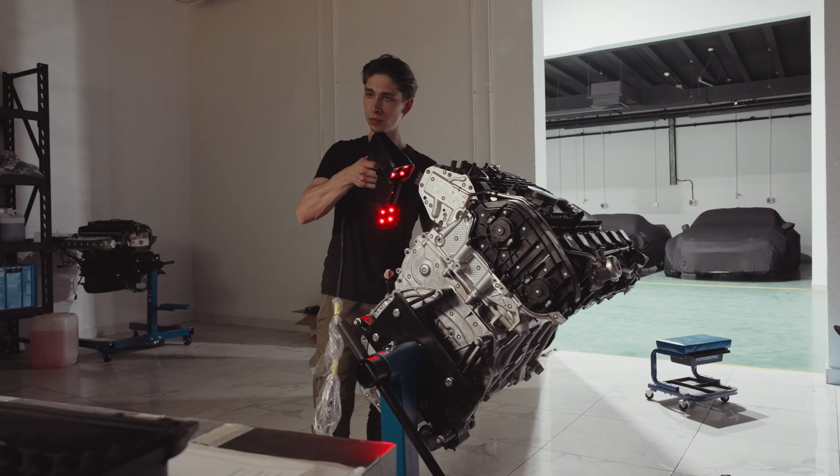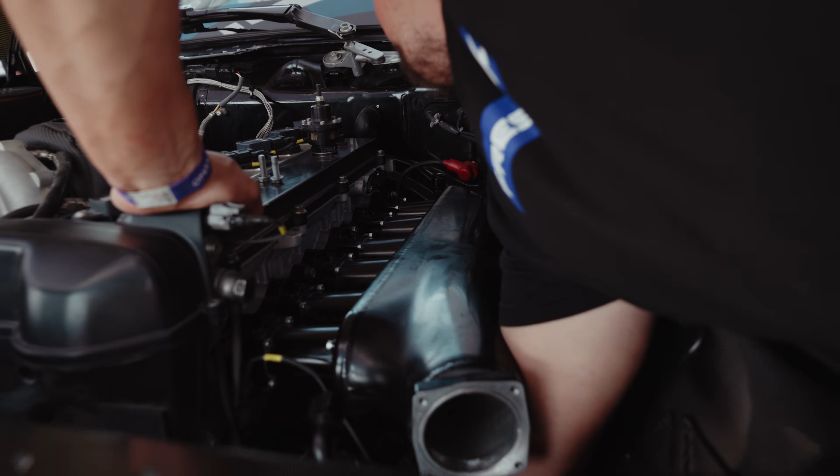Nowadays, there is the undisputable king of drifting, and of course, it is the 2JZ engine. It is proven by decades, and of course, it's reliable, it's tunable, and it's a ready-to-use solution. But we're using the BMW S58 for our Nissan Z platform. Why? Because we like challenges.

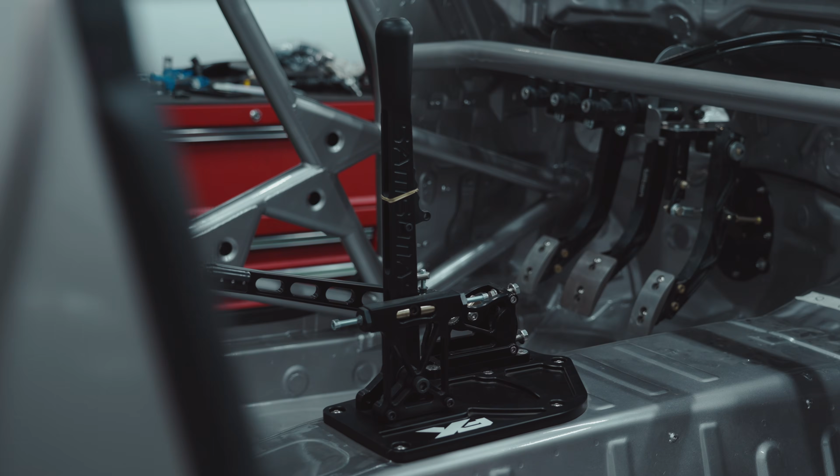But to be more serious, we want to stay ahead of the time and prove the S58 is not just a new engine, but it's a good platform for solutions and for engineering stuff. So let's have a quick look at it. The 2JZ is quite an old platform and it has a cast iron block. At the same time, the S58 has an aluminum one.

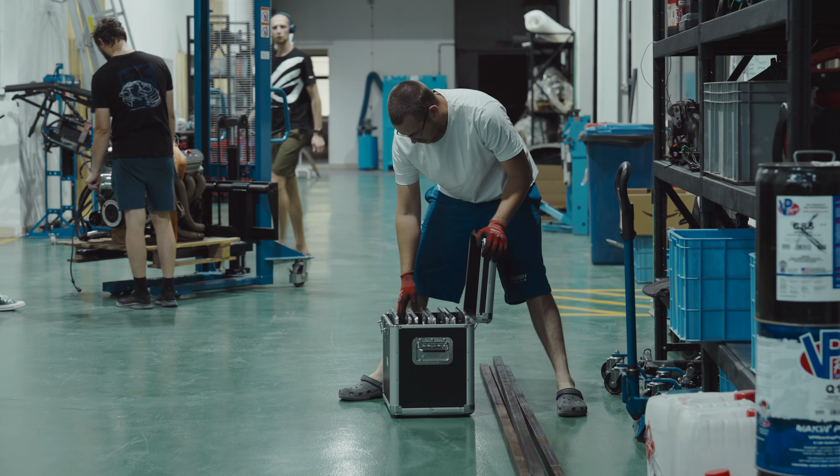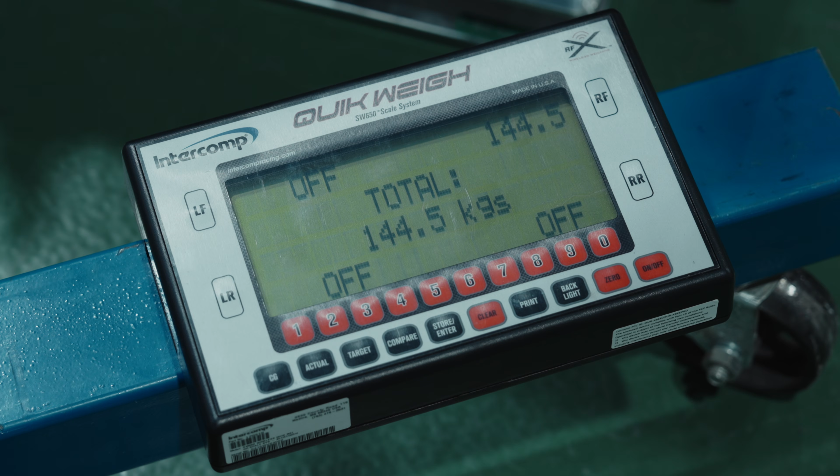We weighed these two engines and it turns out that without fuel pump, accessories and injectors, the S58 is 113 kilograms, and at the same time the 2JZ is much heavier, it's 144. And the third one, despite 3 liters for both engines, the 2JZ is distributed injection, and for the S58 it's direct. That's way better.

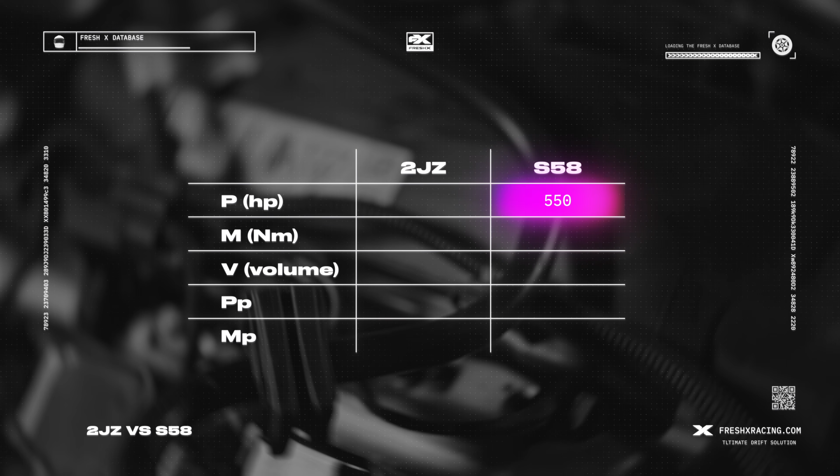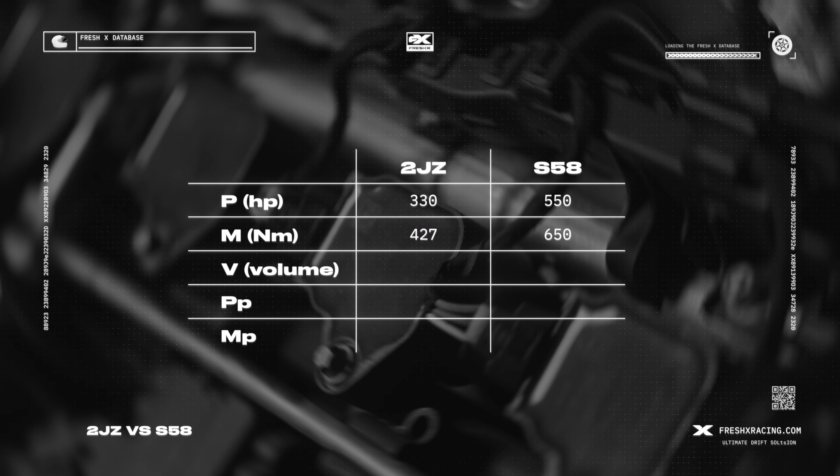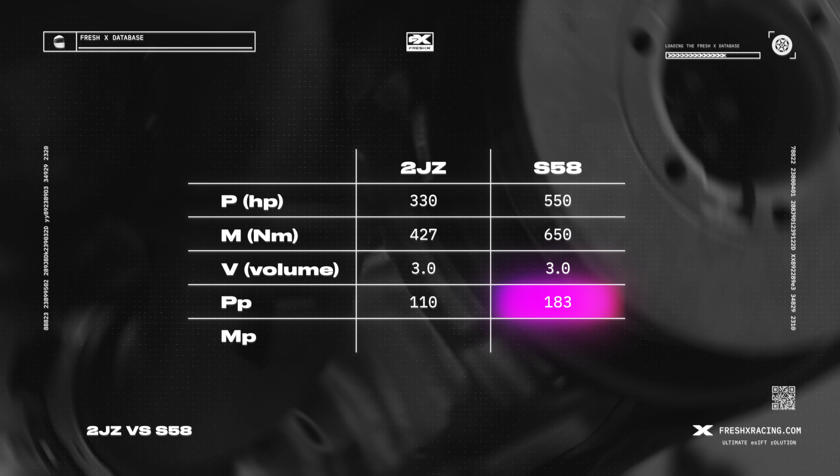What's connected to the major parameters like specific torque and power for these two engines, that is crucial for drifting. The S58 has 550 horsepower and 650 Newton meters. At the same time, the 2JZ has only 330 horsepower and 427 Newton meters. And since they are both 3-liter, the 2JZ delivers only 110 horsepower per liter, and at the same time the S58 delivers 183. And for Newton meters, the 2JZ is only 142 and the S58 is 216.

That's way better. So at the end of the day, the S58 is newer and it has much potential for the parameters and for engineering solutions, but right now there is just a lack of these engineering solutions, and this gap we want to fill.

Basically, the S58 is just the new generation of BMW 6-cylinder engines like the B58. And at the same time, it's a much more improved version of the S55, which has problems with the bearings, with the cooling system and durability. So in the S58, all of these problems were tackled and overcome, and now it's the progressive version compared to the S55, B58, and of course the outdated 2JZ. Let's look at the figures.

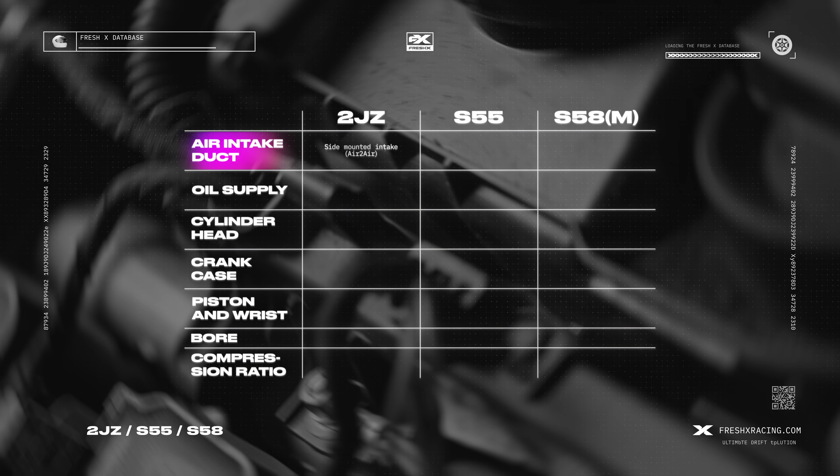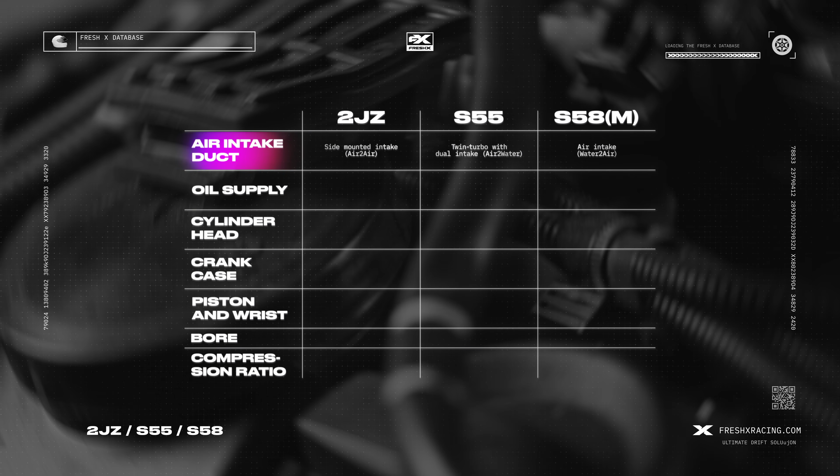The 2JZ engine has the side-mounted intake for high boost applications and an air-to-air intercooler. At the same time, the S55 uses twin turbo with a dual intake duct, so it's a water-to-air intercooler, and the S58 features the new air intake duct designed for indirect charge air cooling, so it's a water-to-air system, the new one.

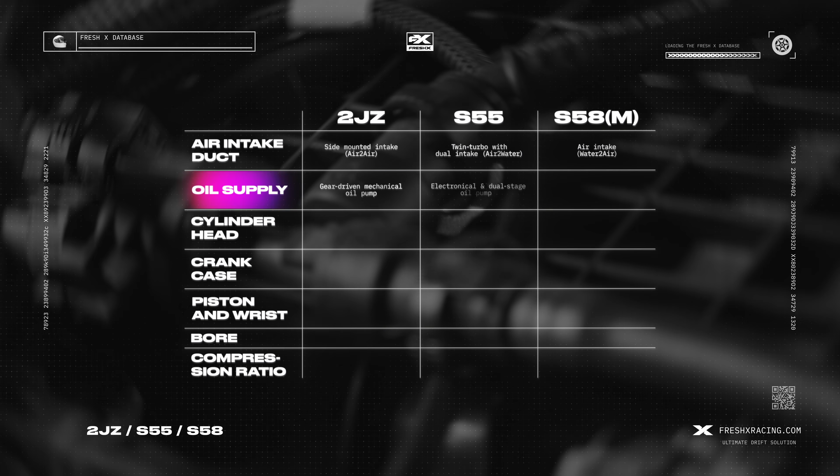The 2JZ has a gear-driven mechanical oil pump that can starve under high G-forces. The S55 uses an electronically controlled dual-stage oil pump, while the S58 has an electronically controlled oil pump with an additional oil pump lid and oil return pump.

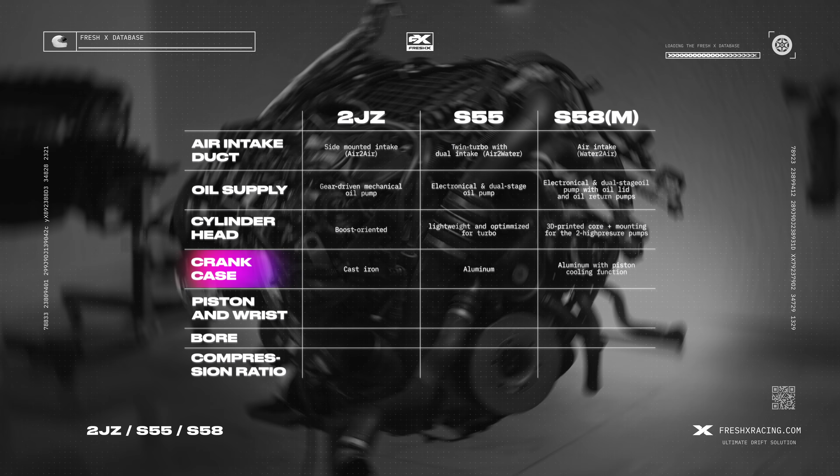The S55 has a lightweight cylinder head and it's optimized for the turbocharger. And the S58 has a cylinder head designed to accommodate 2 high-pressure pumps and uses a 3D printing process for its core. That is so important and so new. So, about crankcases. The 2JZ has a cast iron closed deck one, the S55 has an aluminum closed deck too, and the S58 also has an aluminum closed deck, but it has the oil duct for switchable piston cooling.

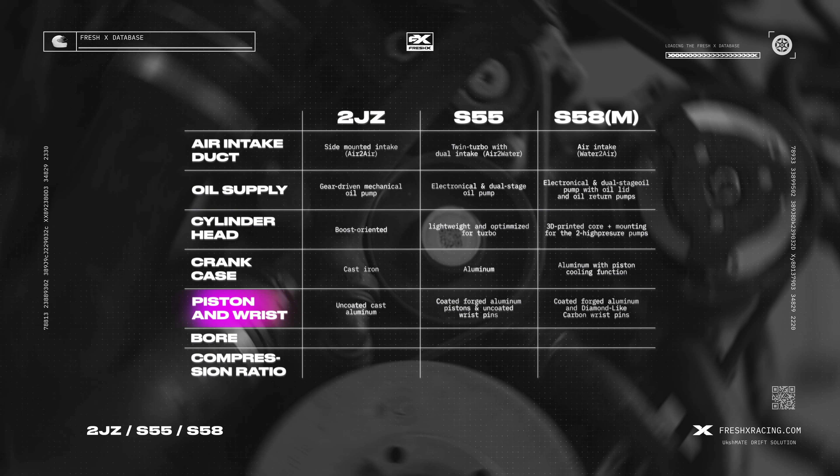By the way, about pistons, in the 2JZ we have uncoated cast aluminum ones, in the S55 we have coated forged aluminum pistons and uncoated piston pins, and in the S58, we have forged aluminum pistons and reinforced connecting rods to handle high turbo boost with diamond-like carbon coating. Last but not least.

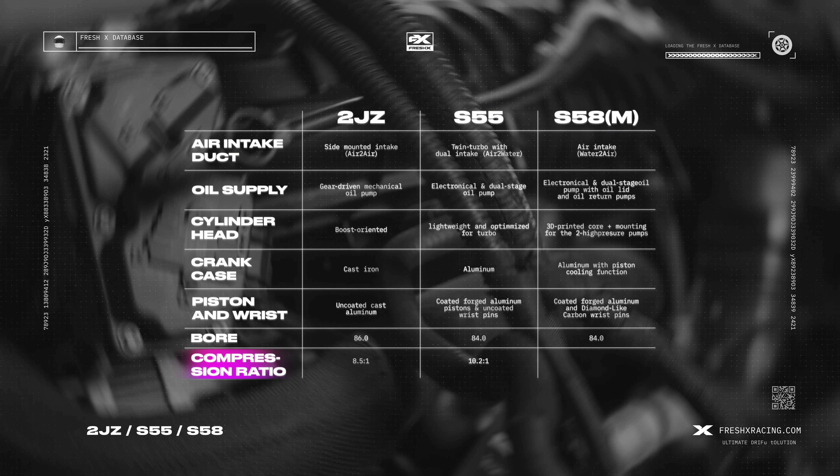About bore size, the 2JZ has 86mm and both the S55 and S58 have 84mm. The last point is the compression ratio. The 2JZ has 8.5 to 1, the S55 has 10.2 to 1, and the S58 has 9.3 to 1.

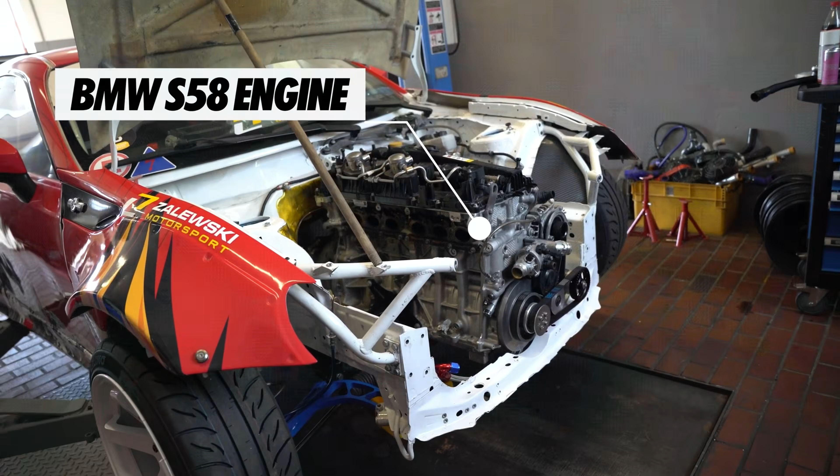So, despite the novelty, the S58 is being used by a number of drifters of the top professional drift championship, like Mika, Red Bull Drift Brothers, and Adam Zalewski. And as we said before, there is really not so much engineering solution for this exact engine, but we're taking the challenge to make it more professional and in the proper way.

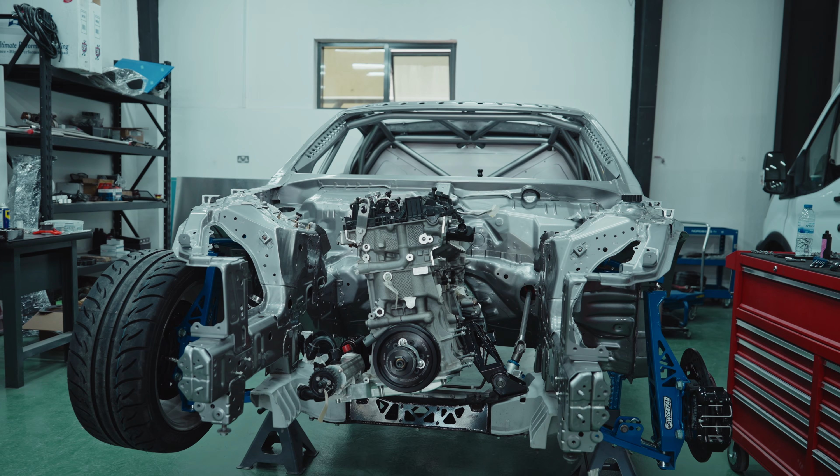The first issue we encountered and faced was the oil pan and the oil system. It is okay for heavy loads and it's okay for drifting even with such pressure, but it conflicts with the non-BMW chassis. And since we're using a Nissan Z chassis, the oil pan is too bulky and the oil system just doesn't simply fit into the place that it could be.

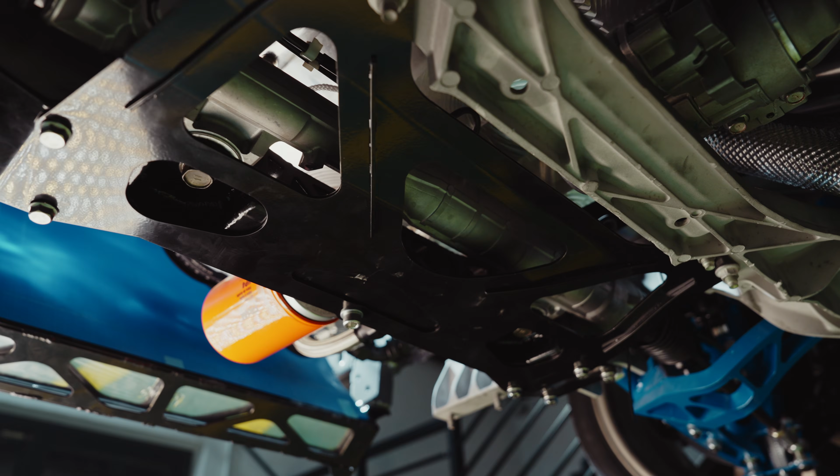The first decision we made was to change the steering rack and the subframe in 3D, but it makes things even worse. In this case, we didn't want to change the structural elements and the suspension; we risked changing the rigidity and the stiffness of the car, and we didn't want it. So ultimately, we got only one solution: to make the oil pan with a dry sump instead of wet. And the moment of truth. This is the S58 dry sump made by ourselves from scratch.

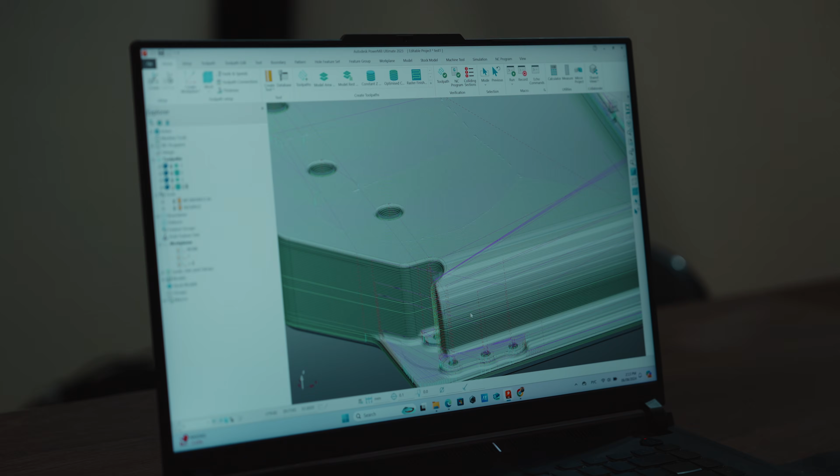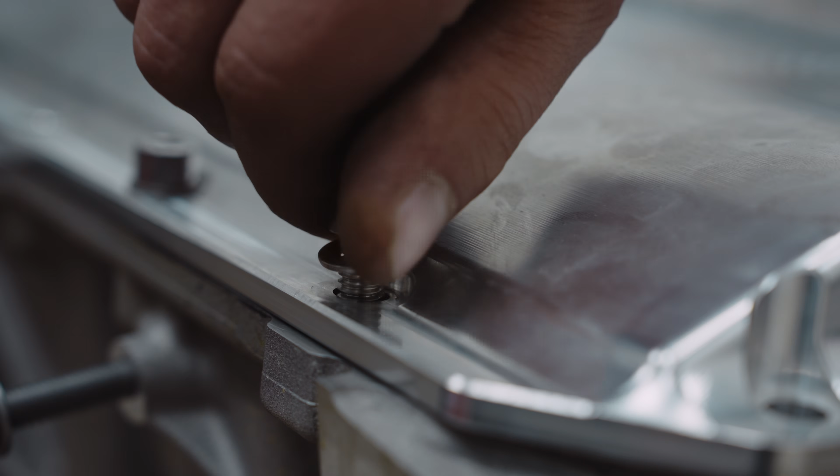It has three main benefits. The first one, it fits the settings of the factory and doesn't interfere with the suspension. So now it fits all the parameters that we want from it. The second one, it now sits a bit lower and it helps with the weight distribution of this car. And the third advantage is more structural. Now we prevent the leaking of the oil and the starvation of the oil.

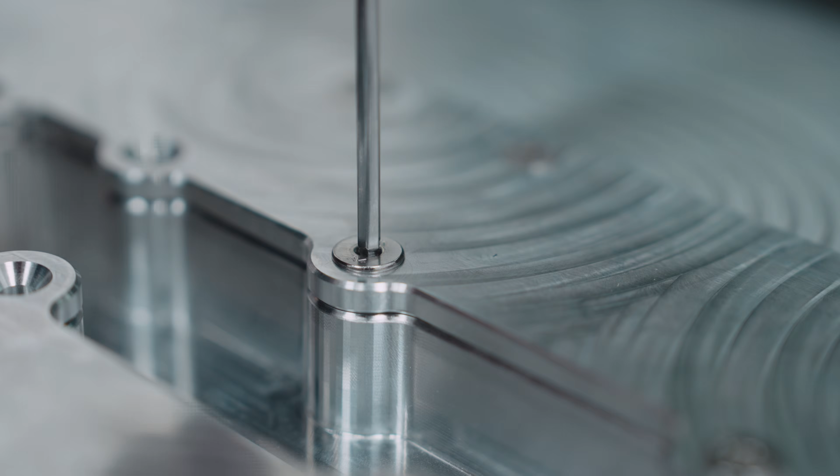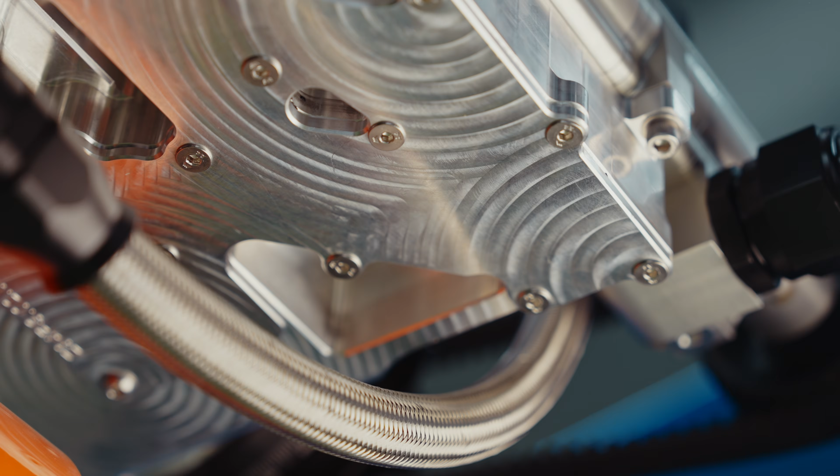Long story short, when your car is going from one transition to another, of course, in your oil pan you have the oil moving from corner to corner. And now we prevented this oil starvation, when you can get air instead of oil. How it will be tested and how the dry sump shows itself in a test, we'll see a bit later.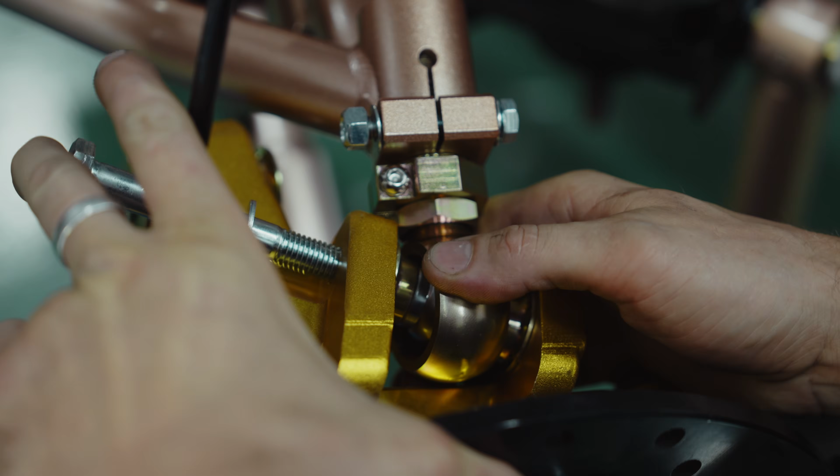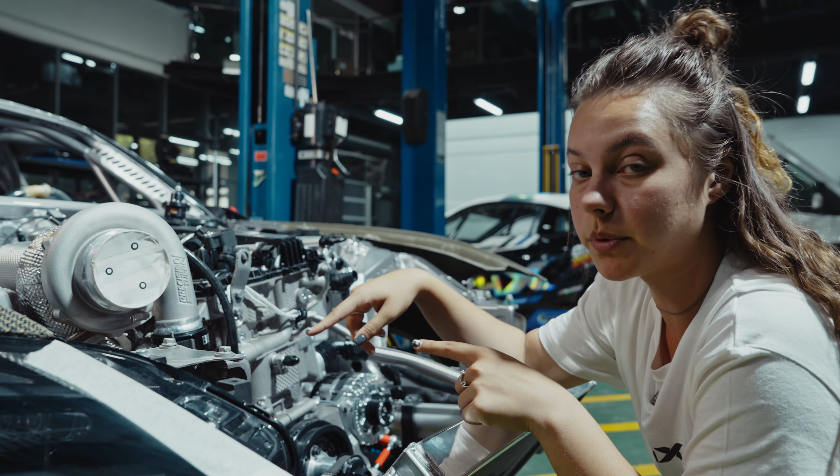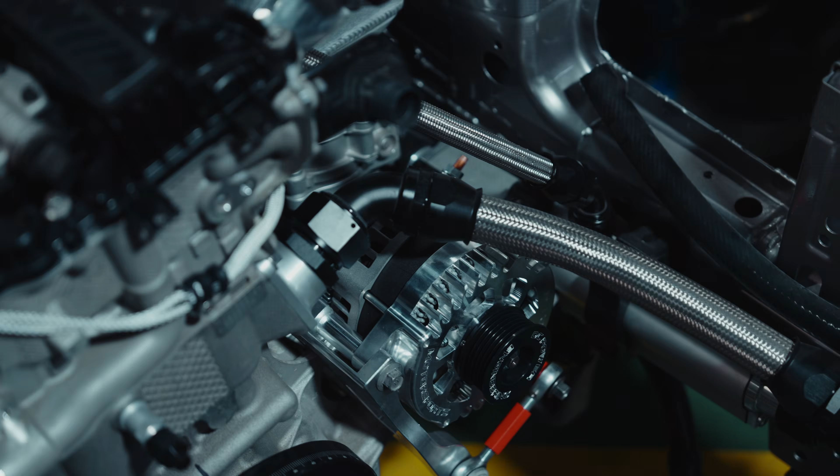If you pay attention to the turbo, initially it was two small turbos, but we decided to change to a big one. In other words, we changed from the twin turbo to a single turbo for this S58 engine. And this way we gain two advantages. The first one is the simplified engine layout or overall design. And the second one is the simplification of the maintenance, refinement and repair of the exhaust components.

It is well known that in stock this engine can handle more than 1000 horsepower, but for us it's just a matter of the individual approach, individual parameters that will be suitable for us with a good output, whether it would be 800, 1000 or 1200, whatever.

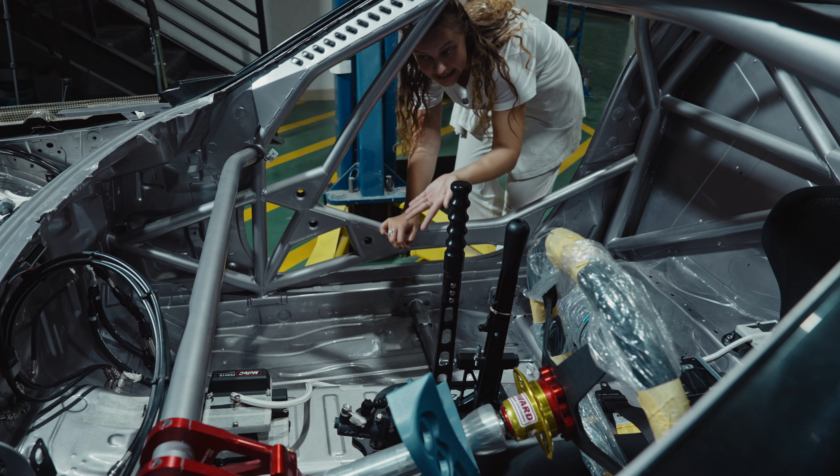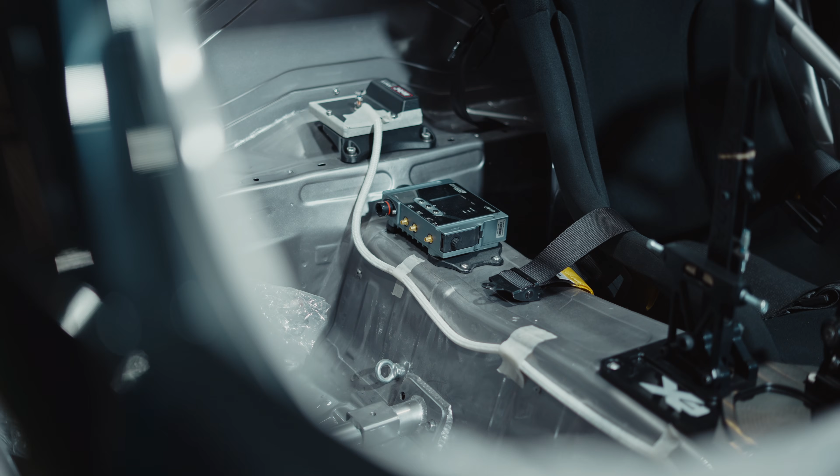Hope now it's more transparent to you why we chose the S58 over the 2JZ, how we did the dry sump, and how we gained the parameters that we needed from this engine.